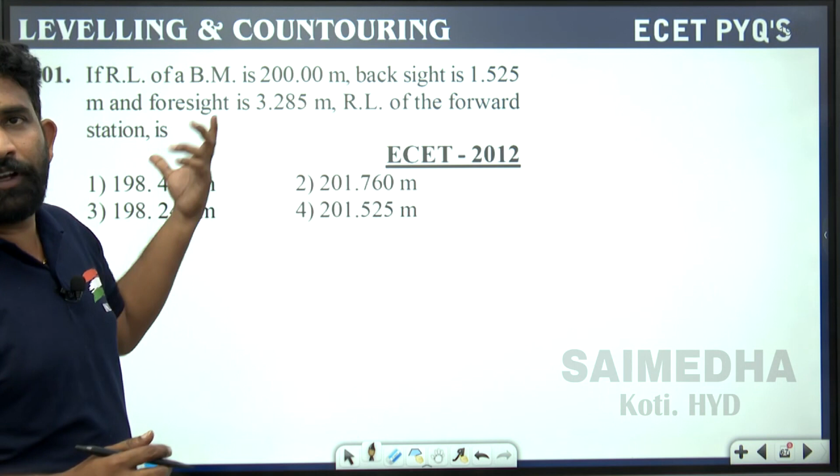Now we are going to see the ECET PYQs of the chapter Leveling and Contouring. So if you see the very first question: if the RL of the benchmark is 200, backsight reading is 1.525, the foresight is 3.285, RL of the forward station is dash. The very first thing here is, try to draw a figure from the given data, right? So this is a benchmark. RL of benchmark is 200,

where the backsight reading on the benchmark is given here as 1.525 and the foresight is 3.285. Now he is asking us the RL of the forward station. Very simple here. This is 200. So 200 plus 1.525 minus 3.285 will be giving me the answer. Why? Because backsights have to be positive, foresights will be negative, because here no inverted staff was there. So you can take the direct values here.

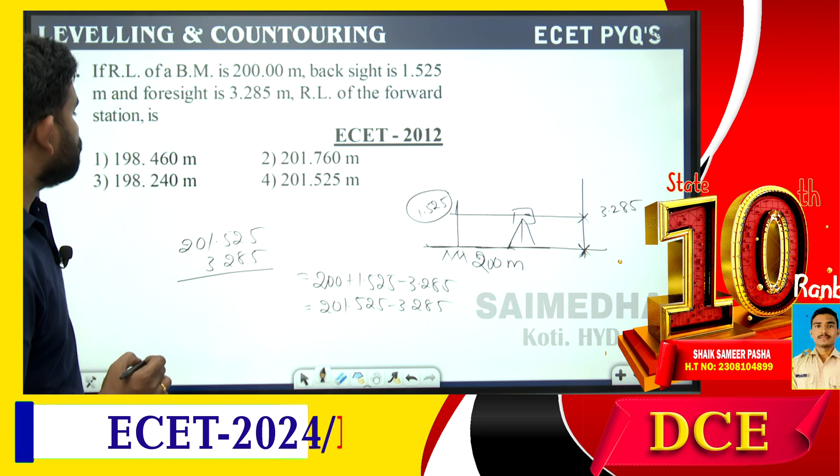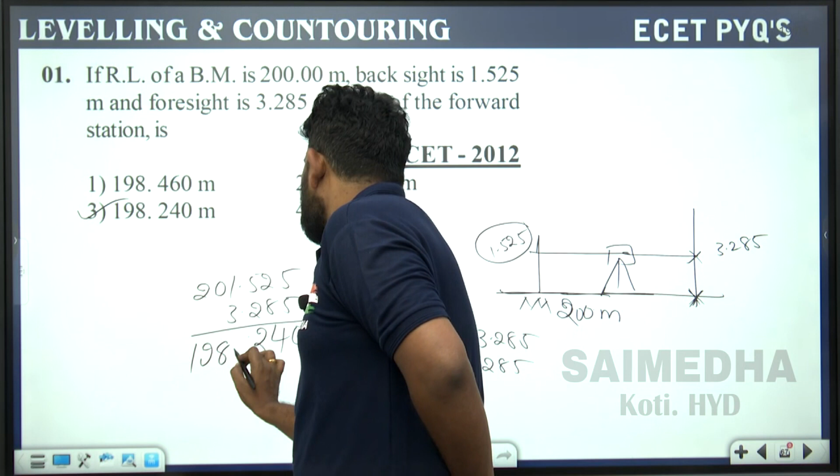201.525 minus 3.285. So if you subtract this, 201.525 minus 3.285, this is 0, 8, this is 4, this is 4 minus 2, this is 2, so 240. So directly I will be taking this 198.240. So this will be the correct answer. This RL here is 198.240. Very simple and easy equation, right?

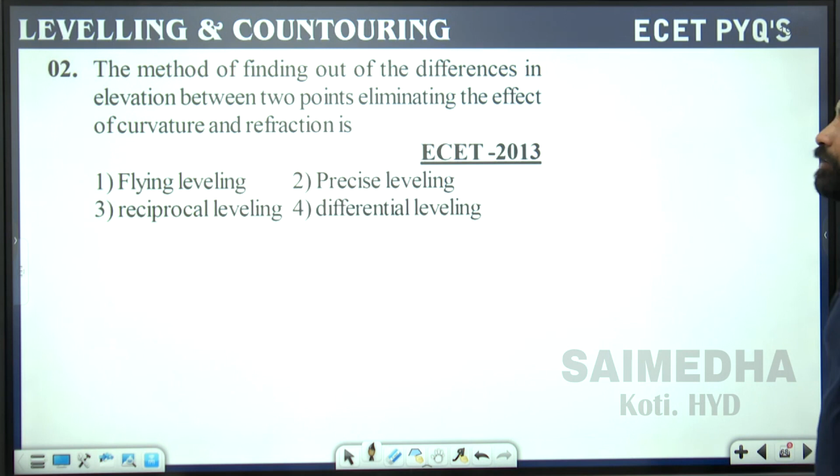Moving further, the method of finding out the difference in elevation between 2 points eliminating the effect of curvature and refraction. Curvature and refraction will be eliminated only in the case of reciprocal leveling. So direct answer here, reciprocal leveling. The surface of zero elevation around the earth which is slightly irregular and curved is known as the geoid surface, because whenever you see the earth's surface when it is completely filled with water, whatever surface this outer surface occupies, we call it the geoid surface. Next, the fixed point of known elevation is called benchmark because it is a point of known elevation.

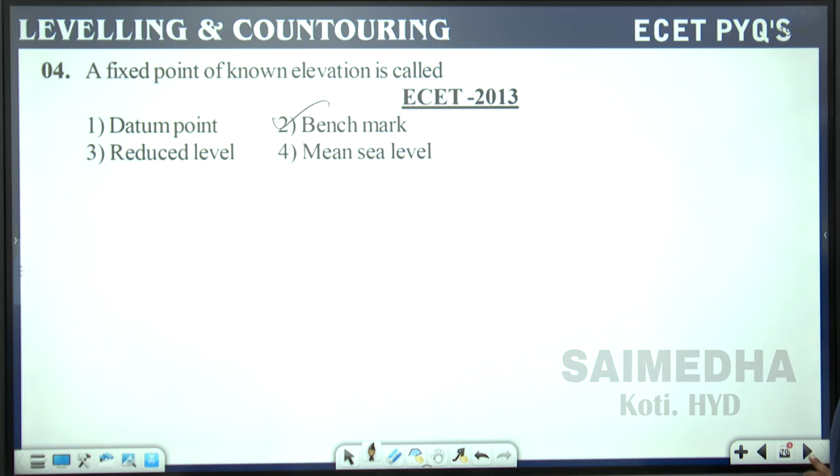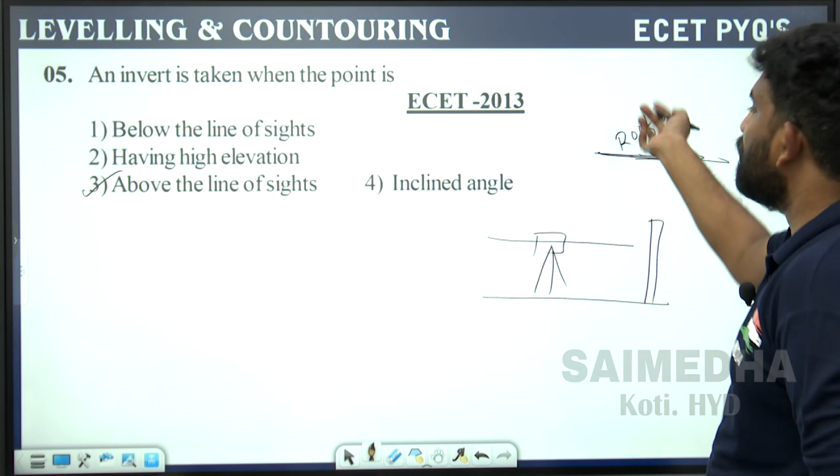An invert is taken when the point is above the line of sight. See here, this is the line of sight, and if I want to find out the RL of roofs, it is not possible for me, because I won't be able to touch this one. So if it is beyond the line of sight, then I will be going for the inverted staff reading. That means I will be inverting the staff like this, so that I will be able to read and reach the top. So that's the very simple point here.

It is not below the line of sight, it is not having high elevations, it is not inclined angles. So it is above the line of sight. Now moving to the next question. Due to the curvature of the earth, the object looks lower than its original position.

This is the Earth's curvature. If you are observing this point while maintaining our station here, it will obviously appear lower than its original position.

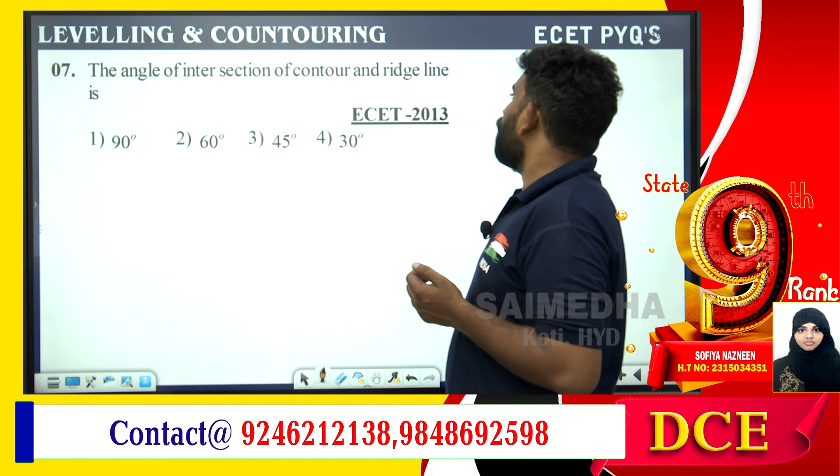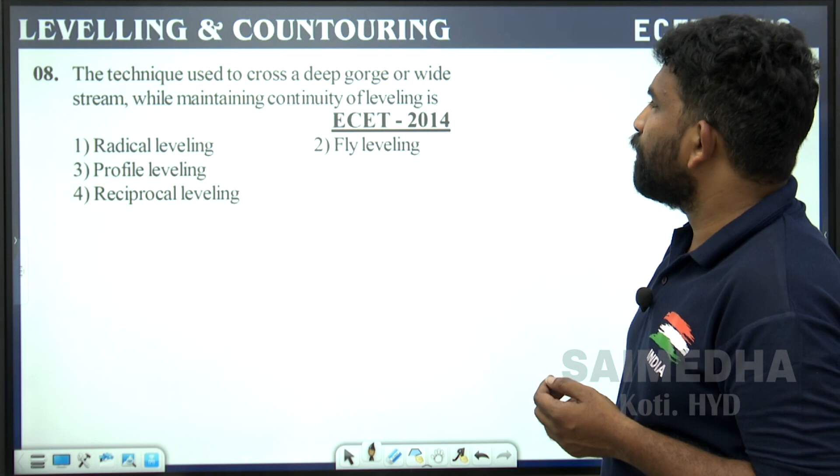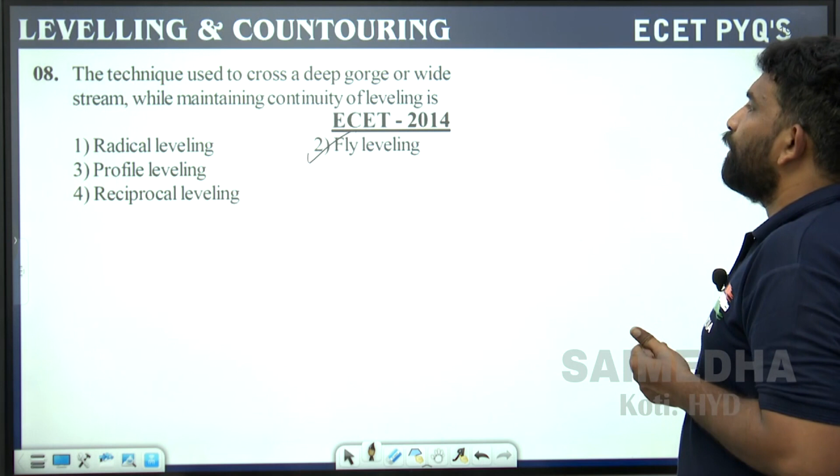This is the technique used to cross a deep gorge or wide stream while maintaining the continuity of leveling. Generally, continuity of leveling will be carried out in fly leveling, so to cross a deep gorge or wide stream while maintaining continuity. The option for this is there is nothing called radical leveling.

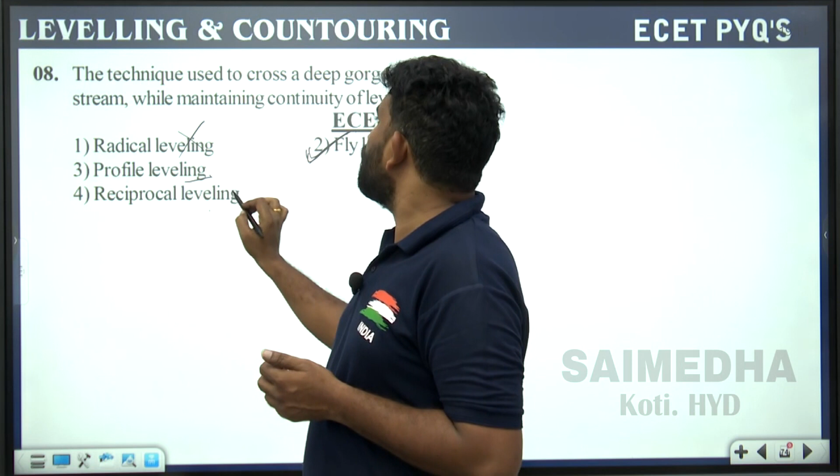Profile leveling will be observed for these alignments. Reciprocal leveling is a technique used to cross a deep gorge or wide stream while maintaining the continuity of leveling.

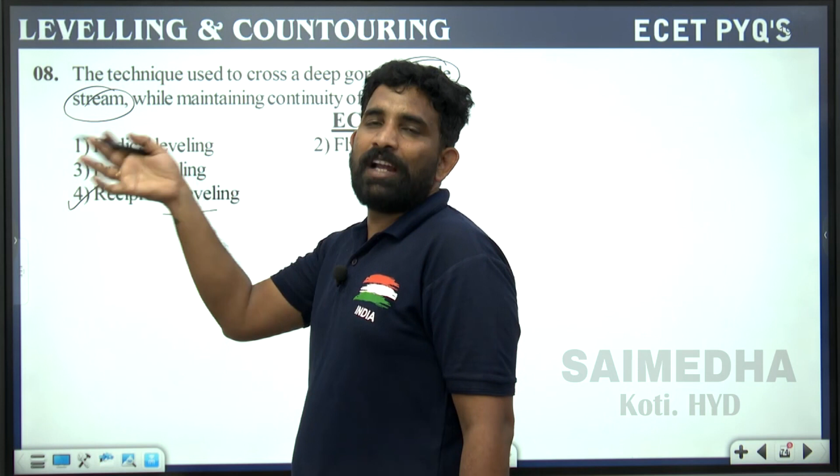Here he mentioned a water body. So whenever a wide stream comes into picture, we will go for reciprocal leveling, because in this wide stream there might be a chance of errors caused due to curvature and refraction. So the correct answer is reciprocal leveling, not fly leveling, because we generally won't opt for fly leveling when a deep gorge or wide stream comes into picture.

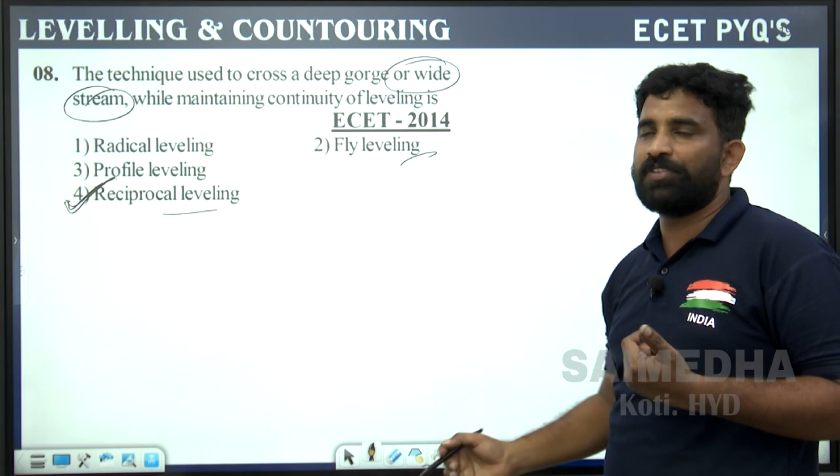Moving further, the sign of combined correction for curvature and refraction for an angle of elevation. The combined correction: generally the curvature correction is negative, the refraction correction is positive, so the combined correction here is negative.

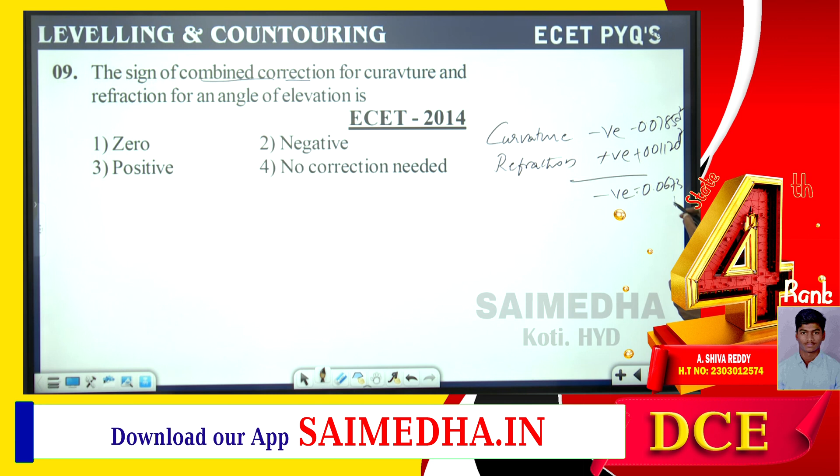Why? Because the curvature value is high, this is 0.0785 d square, and the refraction is 0.0112 d square, which is a positive value. If you solve these, you get a negative value, that is 0.0673 d square. This is the resultant, so that's why the negative value comes here. So clearly negative.

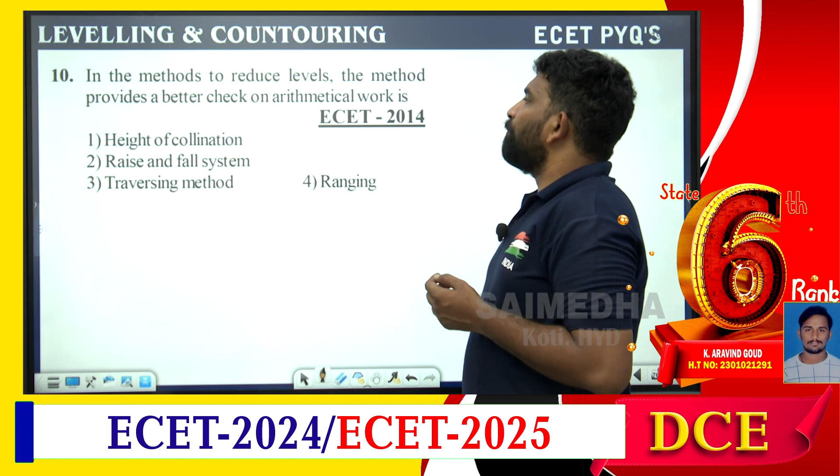In the methods to reduce levels, the method that provides a better check on arithmetical work means we have to calculate more number of checks. That is possible only in the rise and fall method.

If you observe the rise and fall method, the check is: summation of backsight minus summation of foresight equals last RL minus first RL, which equals summation of rise minus summation of fall. So here we have an additional check, providing a better arithmetical check. So obviously the answer is option number 2.

The staff reading taken on a point of known elevation is a backsight reading. So the very first staff reading taken upon a known elevation is nothing but a backsight reading.

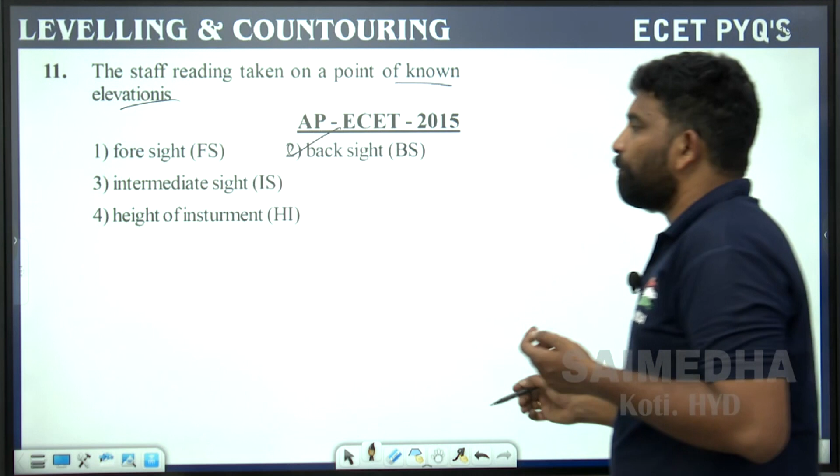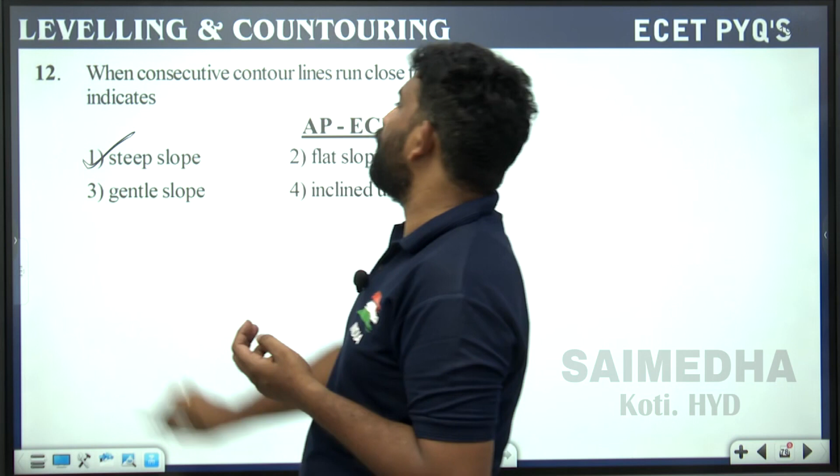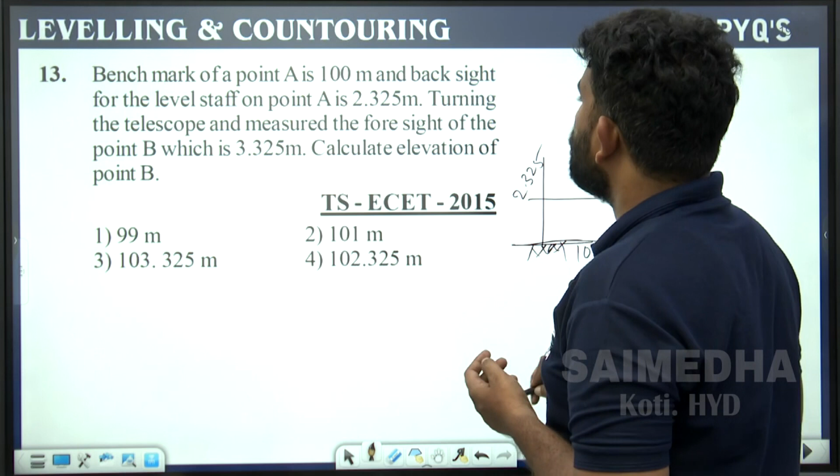The benchmark of a point is 100, and the backsight for the level staff on point A is taken. So here is the leveling instrument, and the backsight reading was taken, and the value came out to be 2.325. Now turn the telescope and measure the foresight of B, which is 3.325. Calculate the elevation of B.

So if I turn this telescope, swinging the telescope head, the value here is 3.325. Now what is the RL of this point? This is point A and this is point B. We are supposed to find out the elevation of point B.

Very simple, as I have already done: this is 100 plus 2.325, because this is the backsight reading which is always positive, minus the foresight, which is negative. If you solve this, you get the answer.

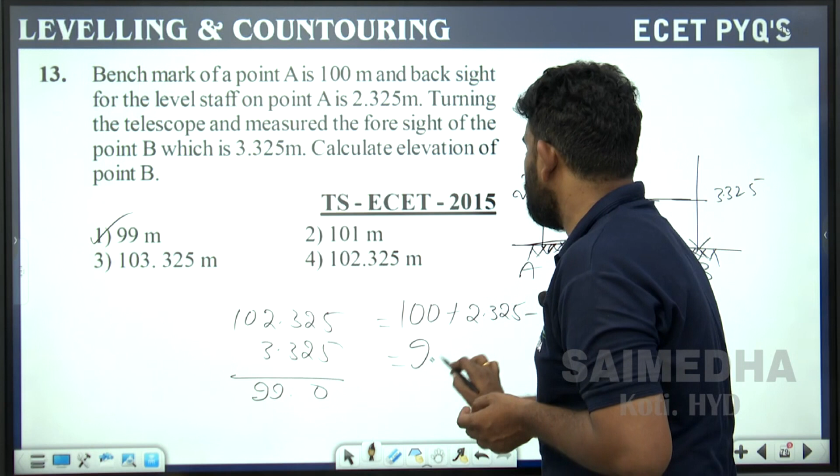So this is 102.325 minus 3.325. This is 0 here, 102 minus 3 comes out to be 99 meters. So very simple, 99 meters. So obviously option 1 is the correct answer.

What is the nature of a terrain if the contour lines increase in elevation from inside to outside? Take a contour map here. What he says is the value increases in elevation, so the RL value will be increasing from inside to outside.

For example, if I call this 99, 90, this is 91, 92, 93, 94, and 95. Now as we go inside, the value is coming lesser. Does that mean this represents a depression? When the values are increasing as we go inside, that represents a hill. But here the values are going on decreasing, so this represents a depression, not a plane, not a ridge.

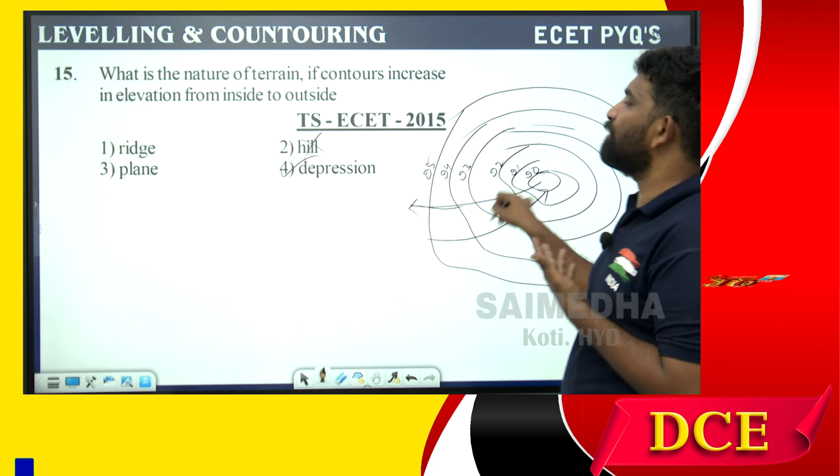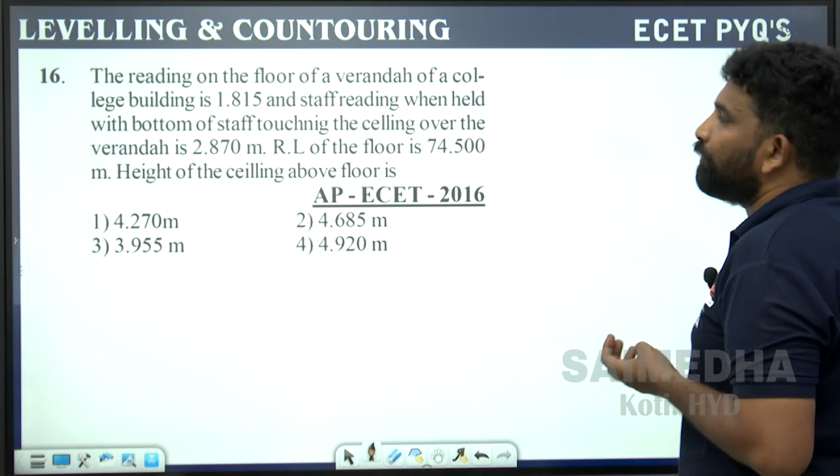Moving further: the staff reading on a floor of a veranda of a college building is 1.815, and the staff reading when held with the bottom of the staff touching the ceiling over the veranda is 2.870. RL of the floor is 74.500. Find the height of the ceiling above the floor.

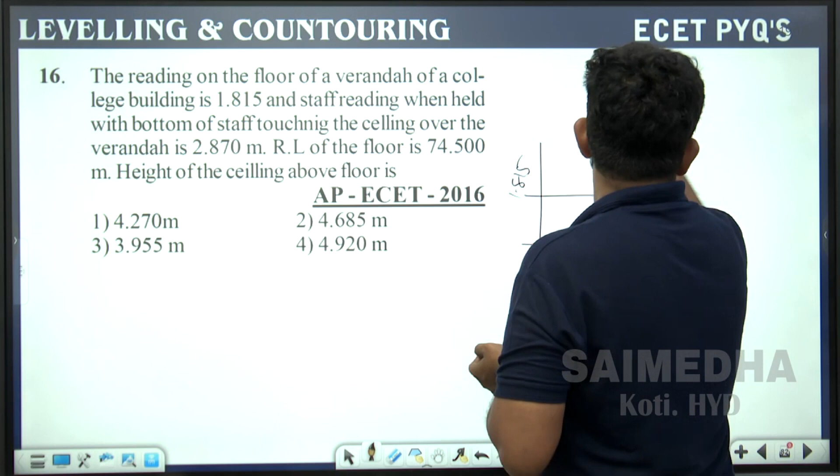This is the floor of the veranda, having an RL of 74.50 meters. If I keep a staff and observe the reading here through the leveling instrument, the floor reading comes out to be 1.815. Here is the ceiling, and there is a staff placed there, so an inverted staff reading will be observed since it's the ceiling, and this reading comes out to be 2.870 meters.

Now the question asks only for the height of the ceiling above the floor. So 1.815 plus 2.870 will give me the direct height of the ceiling. So this is 5, 8, 16, 2, 3, 4, giving 4.685. So 4.685 will be the correct answer, irrespective of the RL given. No need to take care of that, because from here I need to start.

So this is floor and this is ceiling. So total height can be 2.870 plus 1.815 — a direct objective question.

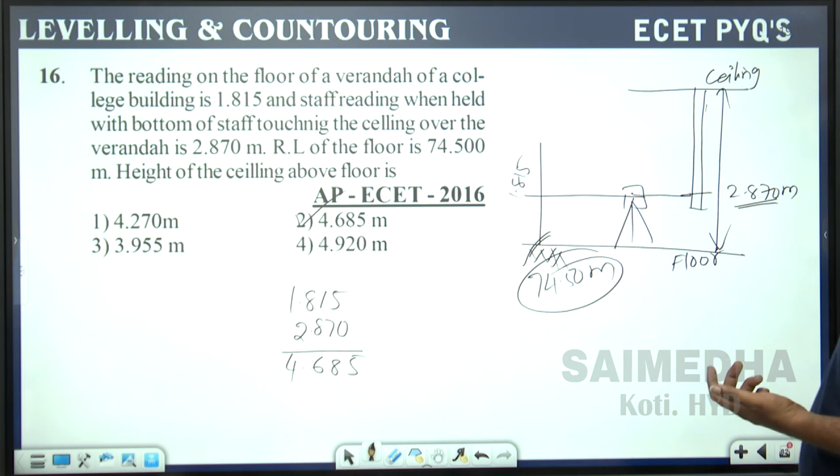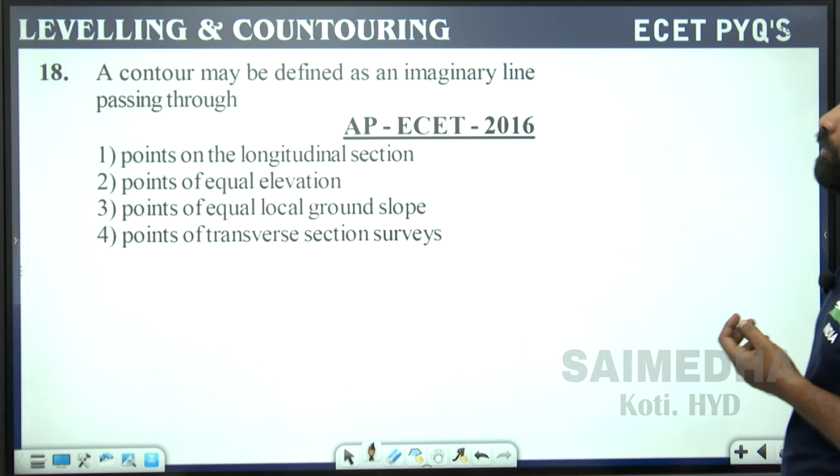Moving further, a contour may be defined as an imaginary line passing through the points of equal elevation.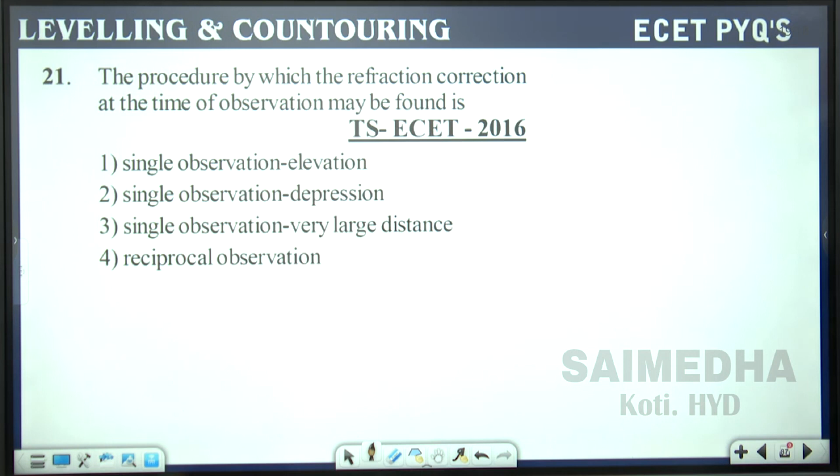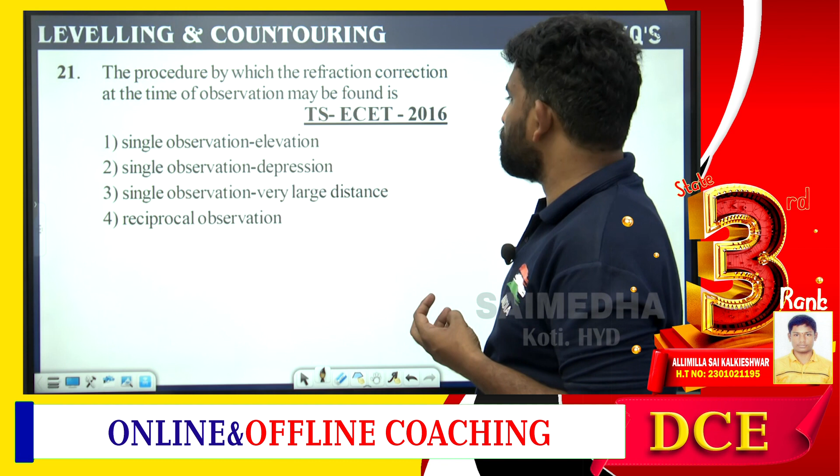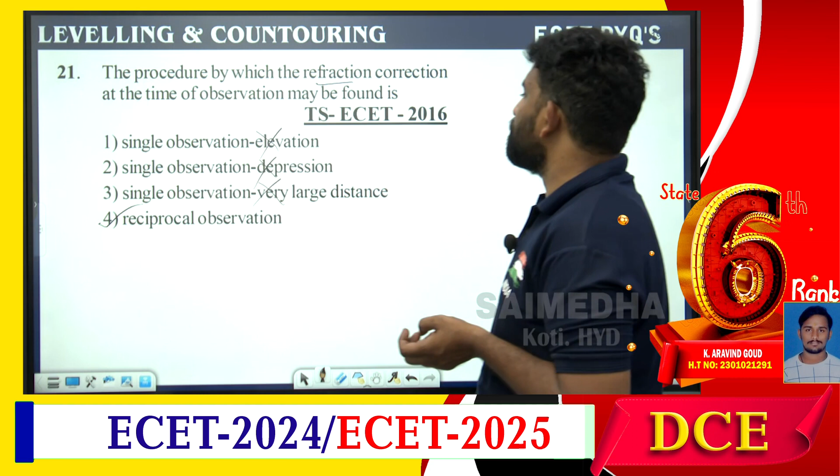Moving further: the procedure by which the refraction correction at the time of observation is found is — options are single observation elevation, single observation depression, single observation at very large distance, or reciprocal observation. The refraction correction is generally found only through reciprocal observations, not any single observation at elevation, depression, or large distance.

Periodic variations in the level of a surface of a large body of water like a sea or an ocean are called tides. Based upon the tides, we are going to find out these elevations - the MSL, that is mean sea level. So periodic variations will be observed for the tides, so as to form this mean.

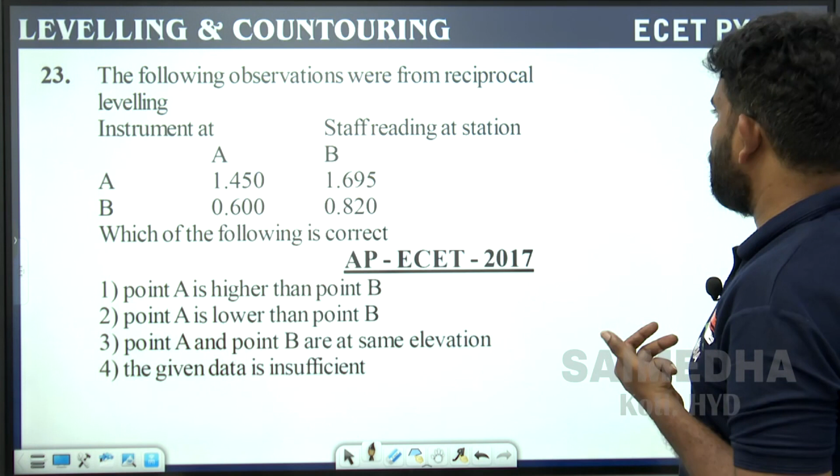The very first reading is 1.450. And if I proceed, in leveling instrument at A and the staff reading at B, if I take from here, the reading is 1.695. That means I have to reach a higher value. I will be able to reach that higher value when the B value is at a lesser ground level, and then I will get higher maximum values.

I will be able to get the higher maximum value when this B value is lower than A. That means A value is higher than B. So point A is higher than point B will be the correct answer.

Simple, direct question. Moving further, a leveling station is a place where the level has been set up.

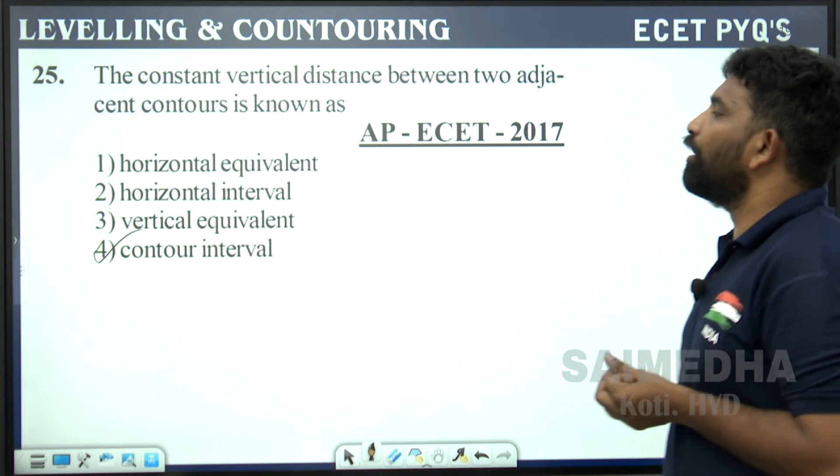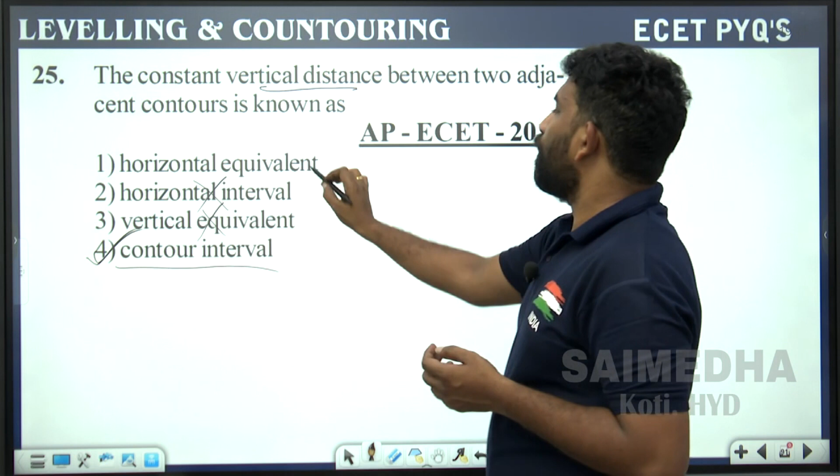The constant vertical distance between two adjacent contours is known as - vertical distance is nothing but contour interval, horizontal distance is nothing but horizontal equivalent. But he is asking us to find the vertical distance, so the answer will be contour interval. It's not horizontal interval, it's not vertical equivalent, the answer is contour interval. Horizontal equivalent is for horizontal distance, so that is not the correct answer.

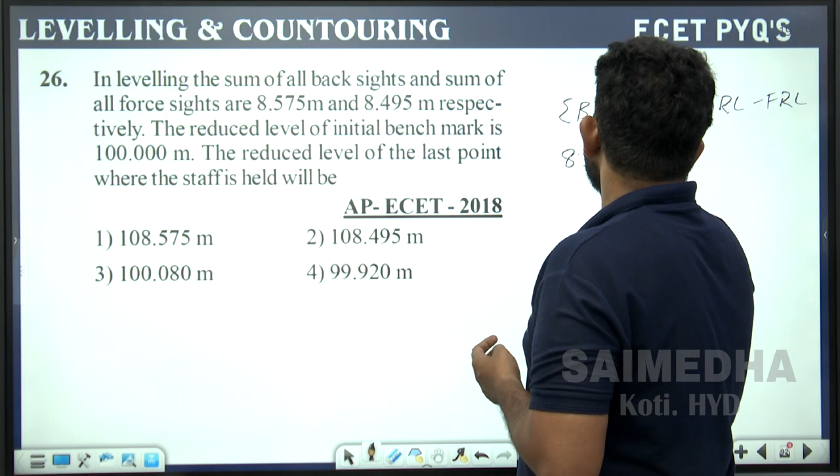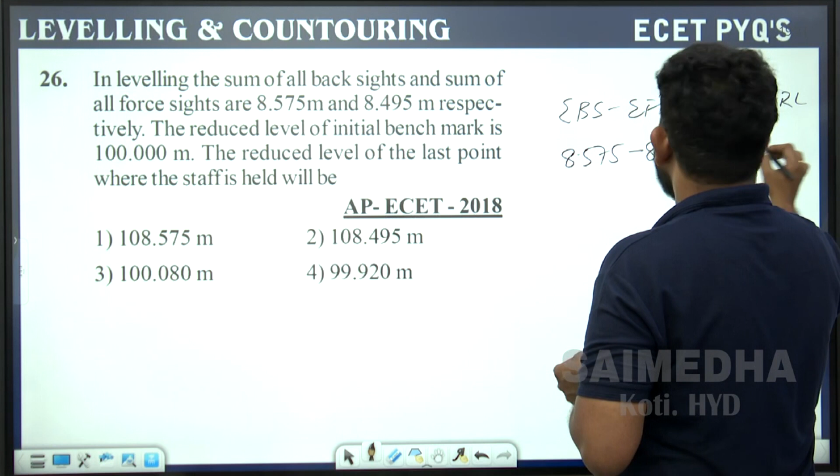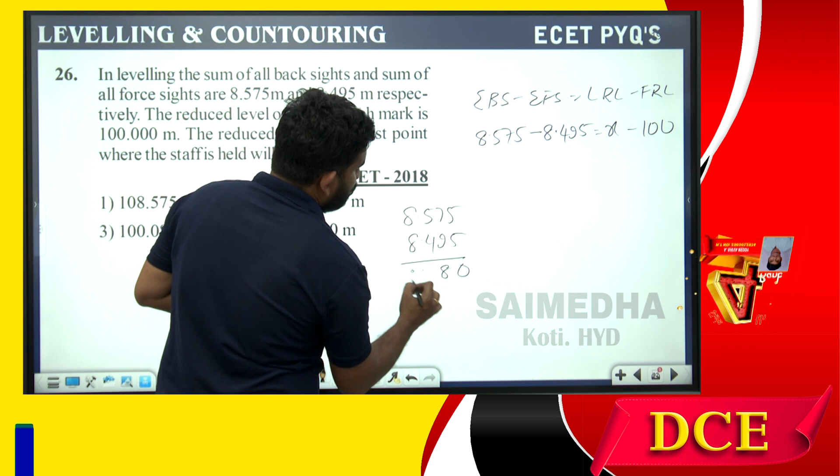So first RL was given here as 100, this is X, so from here I need to find the value of X. 8.575 minus 8.495, the value comes out to be 0.080. So now, 100 plus 0.080 equals X, so the X value comes out to be 100.080, which will be the correct answer.

Simple question. Moving further, for a hilly terrain the ideal method of contouring is the radial line method.

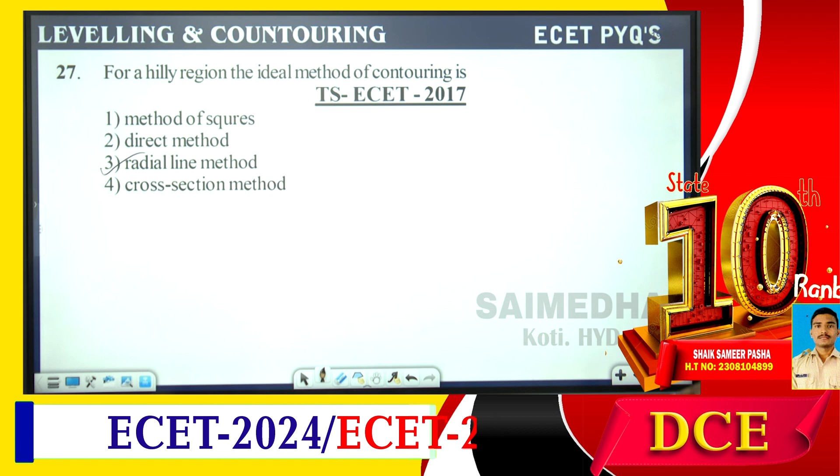If the distance between the instrument station and staff station is 1 kilometer, find the combined curvature and refraction. For curvature alone, the formula is 0.0785 d squared. For refraction alone, the formula is 0.0112 d squared. And for the combined correction, the formula comes out to be 0.0673 d squared.

Now he is asking us to find the combined correction for 1 kilometer. Just substitute the value of 1, and the value comes out to be 0.0673 meters. It is negative, and it has to be negative because combined correction is always negative.

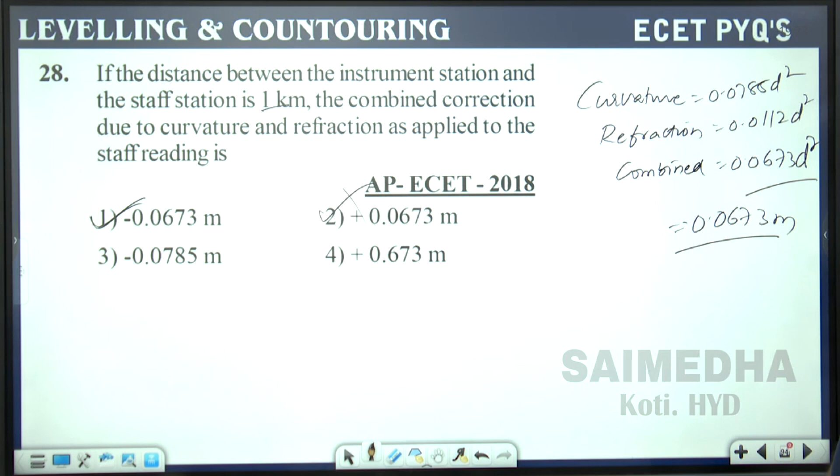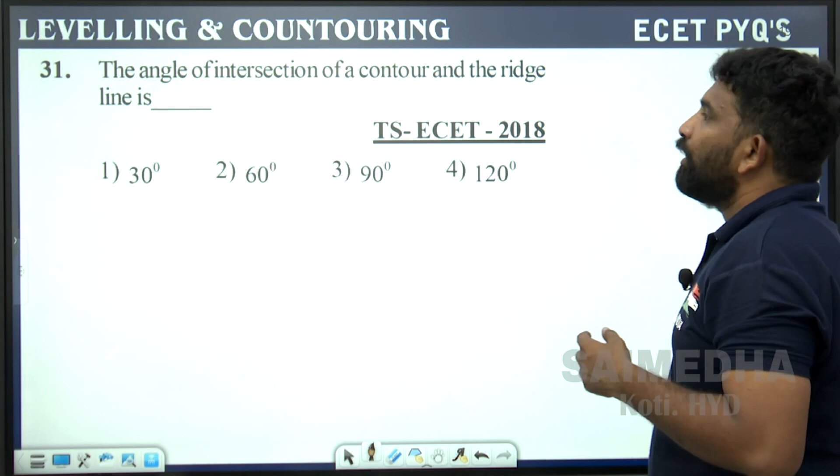Direct objective question. In the leveling survey, the summation of all the back sights and summation of all the fore sights are given here. So we do know the cross check: summation of back sight minus summation of fore sight is equal to last RL minus first RL. Now let us see the given values, the back sight summation and the fore sight summation. This is 8.675 minus 8.595, related to the RL of the initial benchmark. The first benchmark is 100, so X minus 100, right?

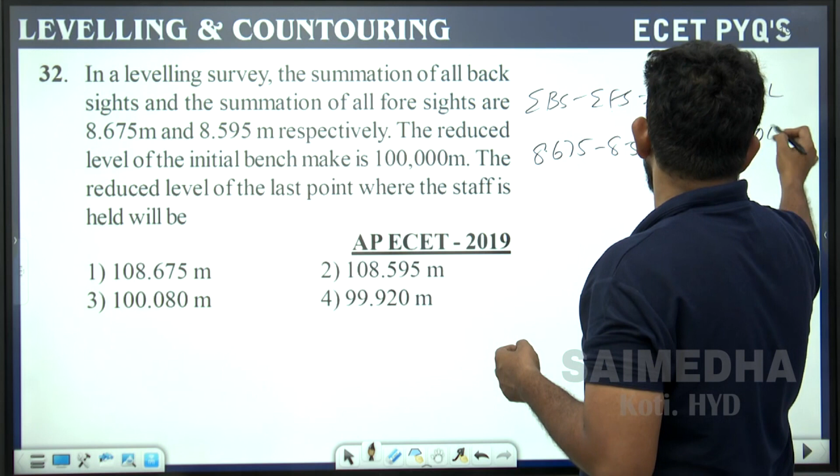So 8.675 minus 8.595 gives 0.080, plus 100, the value comes out to be 100.080 meters. So the X value here is 100.080 meters. So check 100.080 meters.

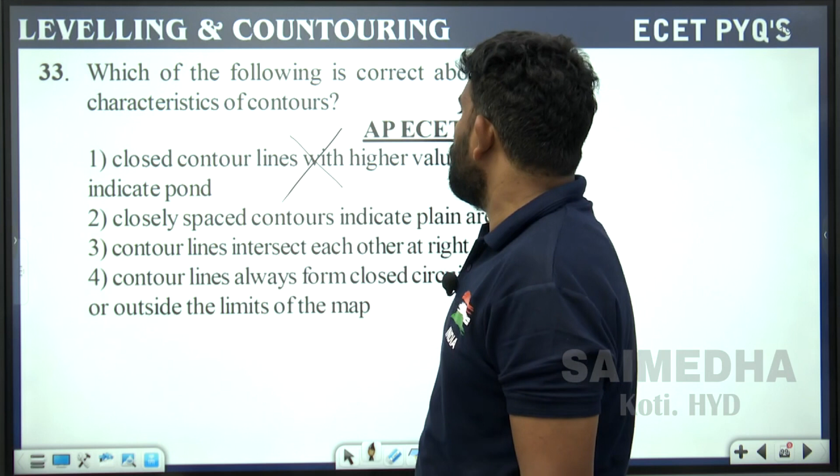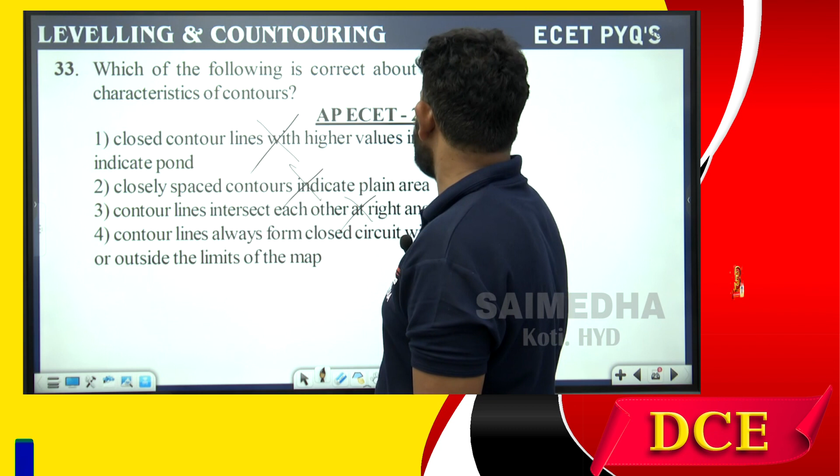Which of the following statements is correct about the characteristics of contours? Closed contour lines with higher values inside represent a pond. No, closed contours with higher values inside represent a hill. Closely spaced contours indicate a plain area. No, closely spaced contour lines indicate a steep slope. Contour lines intersect each other at right angles. No, contour lines won't intersect at right angles. Contour lines always form a closed circuit within or outside the limits of the map. Yes, that's the correct one.

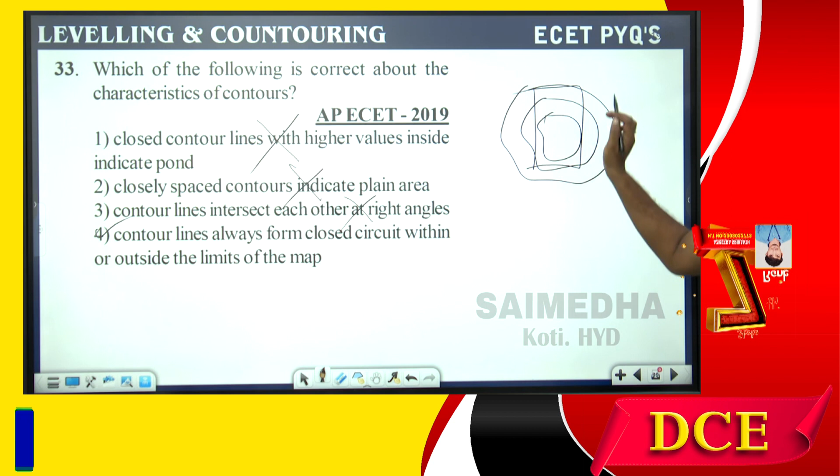So contour lines need not get closed within the map itself, but they have to get closed somewhere outside the map. That's the point he's asking about. Contour lines need not get closed within the map itself, but somehow they will get closed outside the map.

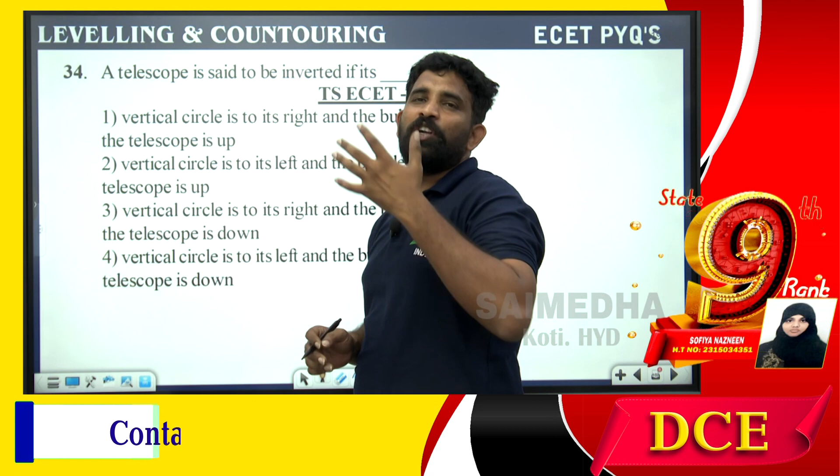If you see the 34th question here, a telescope is said to be inverted if... When is a telescope said to be inverted? Generally for the telescope there will be a gun sight. If it is towards the upper direction, then it is said to be in the correct position. It will be in the correct position when the vertical circle is towards the left of the observer. But he said here it is inverted, so obviously the vertical circle will be towards the right side.

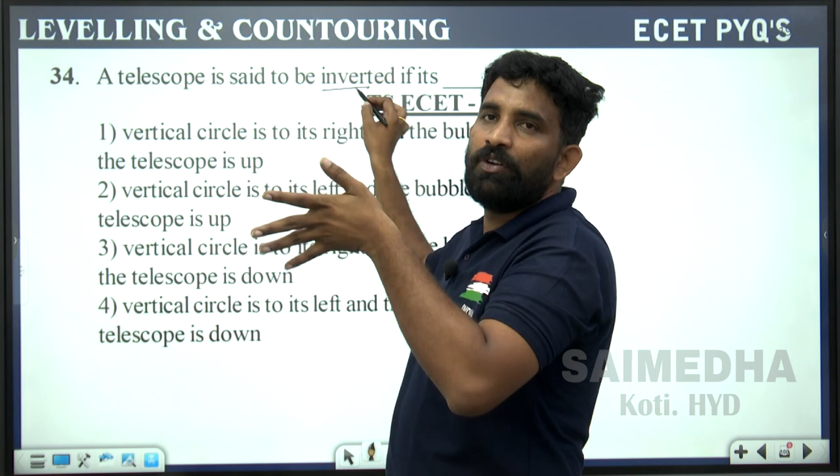And the bubble also will be down. So if you see here, this is right, but the bubble is up. No, this is not the correct answer. It is left? No, it is not left. The vertical circle is to the right, and the bubble of the telescope is down. Yes, this is the correct answer. So option 3 will be the correct answer, right?

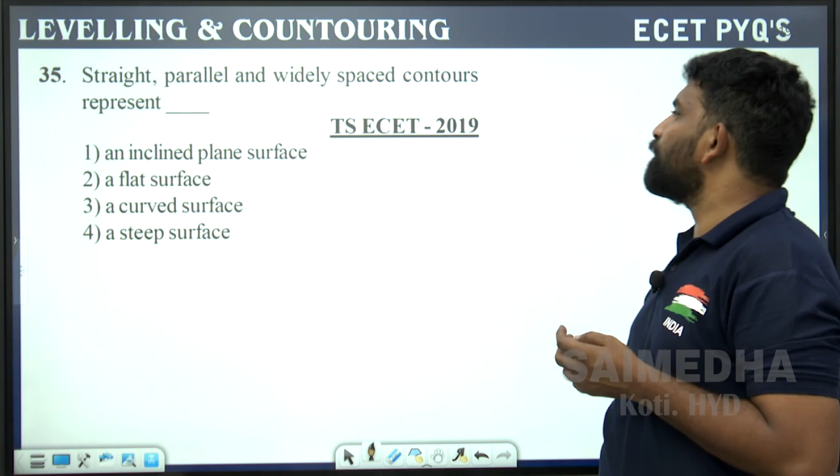Moving further. Straight, parallel and widely spaced contours represent... Widely spaced contours indicate a flat surface. Widely spaced indicates a flat surface. A very simple direct objective question.

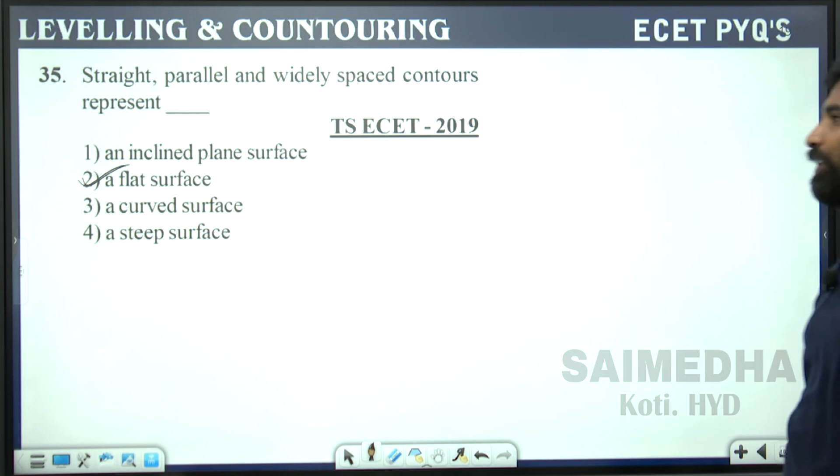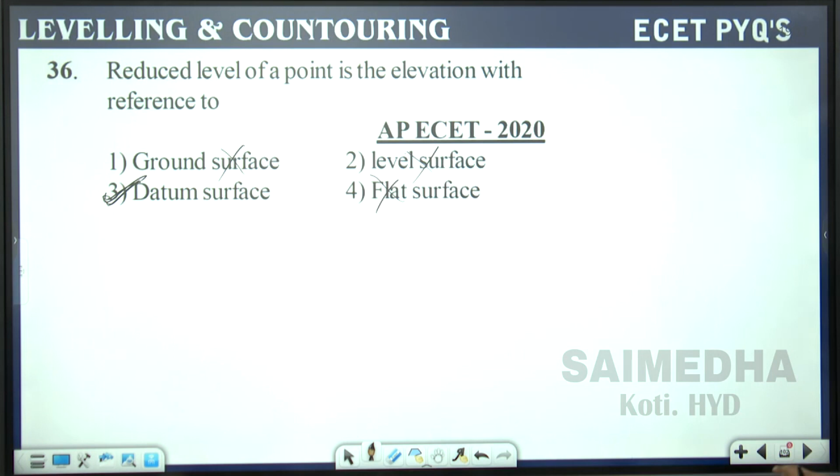Moving further. The observations from reciprocal leveling are as given below. So leveling readings were given here. So it is concluded that... Again here I am going to take the reading. This is station A, and the staff is placed here. Staff reading at station A.

Staff reading at the station A was given here as 1.425. If I go further, the value given here at station B is 1.575, which is possible when the staff is down, because as the staff goes down, the value goes on increasing. So this clearly says that station A is higher than B.

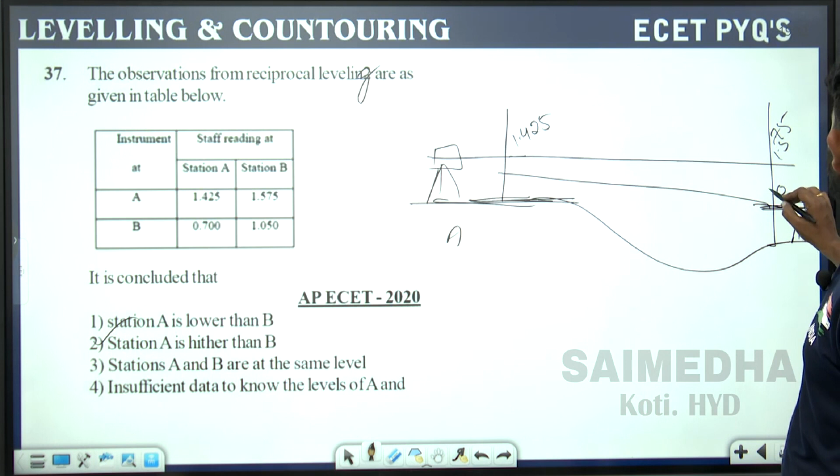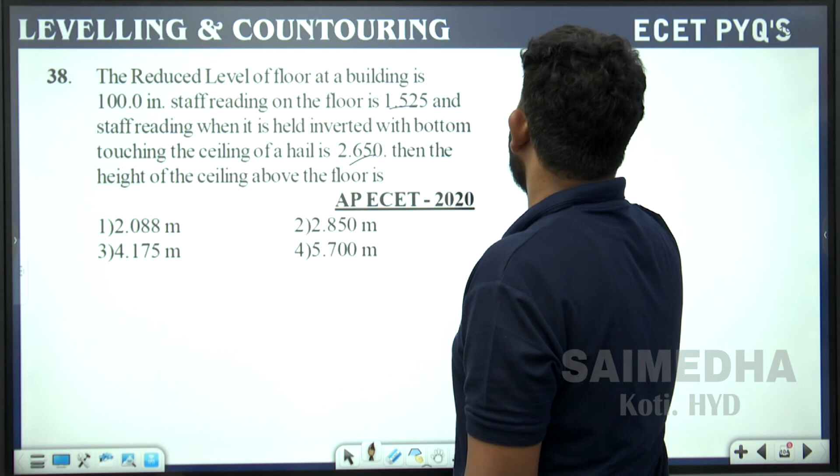38. The RL of the floor of a building is 100 and the staff reading on the floor is 1.525, and the staff reading held inverted with the bottom touching the ceiling of the hall. Already we have seen this question. Just add these two values, 2.650 plus 1.525, and you get 4.175. So 4.175 will be the answer. Simple.

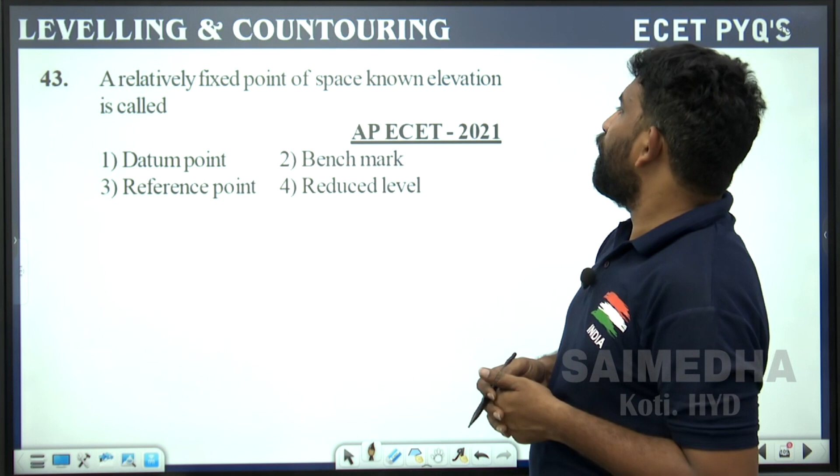A series of straight, parallel and widely spaced contours represents a flat surface. See the 43rd question: a relatively fixed point of known elevation is called a benchmark. A known elevation fixed point is nothing but a benchmark, right?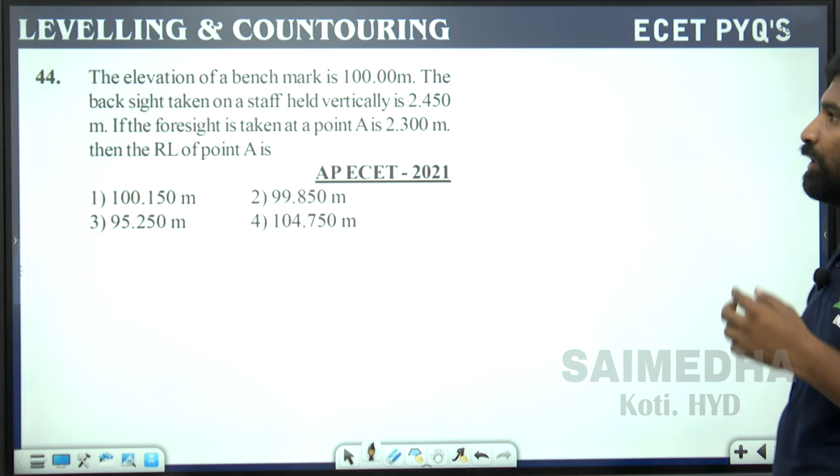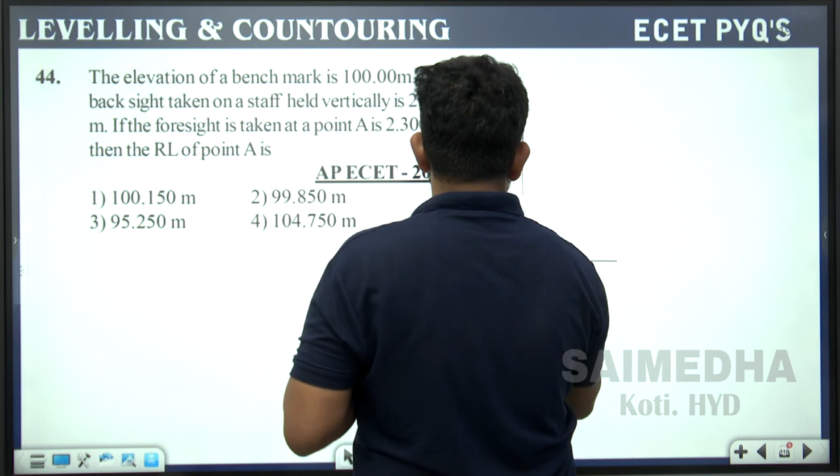Moving further, the elevation of a benchmark is 100 meters, the backsight taken on the staff held vertically is 2.450, the foresight taken on point A is 2.300, the RL of point A is what? So this benchmark has a value of 100, the backsight reading on this staff is 2.450, and the foresight on point A is 2.300. Now what is the RL of this point?

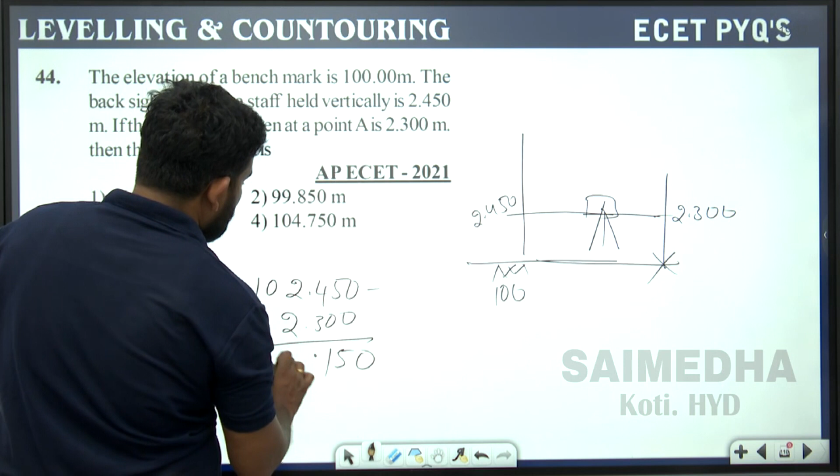Very simple: 100 plus 2.450 gives 102.450, minus 2.300, and you get 100.150. 100.150 will be the answer. Simple, right?

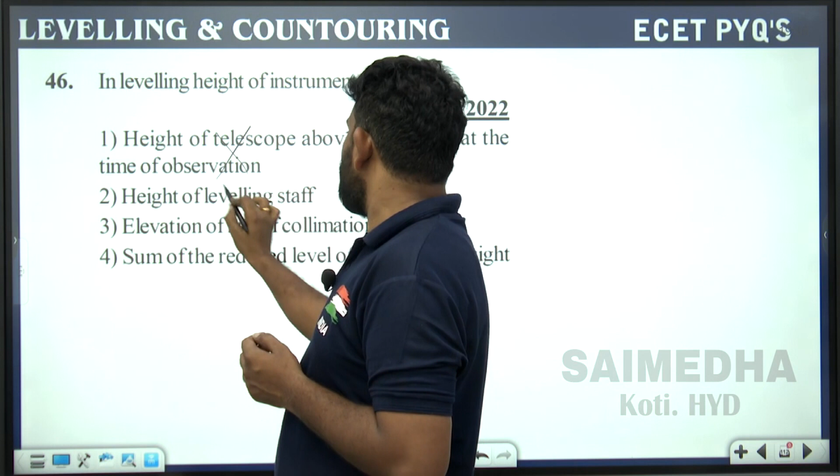In leveling, height of the instrument is: height of the telescope above the ground at the time of observation, no. Height of leveling staff, no. Elevation of line of collimation, yes. Summation of reduced level, no. The only correct answer here is elevation of line of collimation.

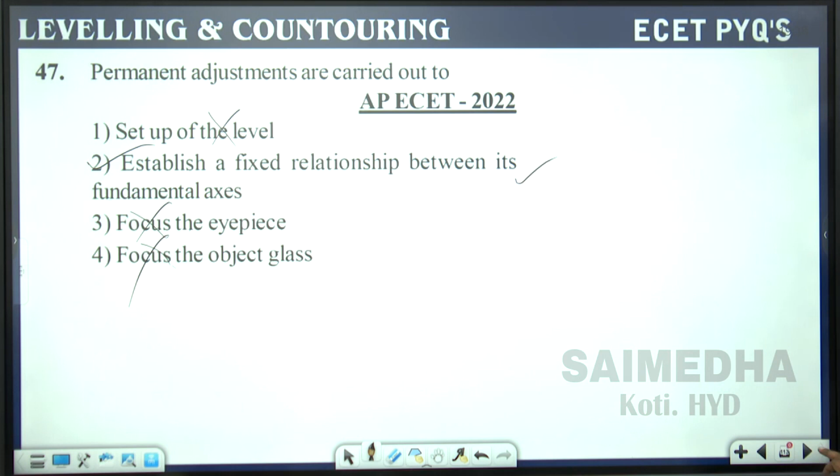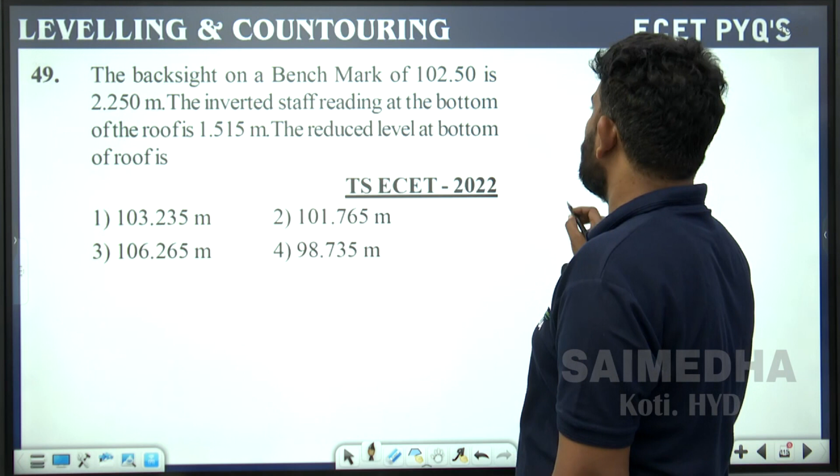Simple. The backsight on a benchmark of 102.50 is a backsight, so bottom of the roof. So again here the roof, okay. So if you see this question in a diagrammatical way here, this is the backsight reading on the benchmark. The benchmark is 102.50, and the backsight reading taken here is 2.250, okay, and it is an inverted staff reading that is taken at the bottom of the roof. So there is some roof here. Upon the roof the reading was taken, and the value is 1.515.

Now what is the question asking here? The reduced level of the bottom of the roof. So very simple here, just keep on adding all those: 102.50 plus 2.250 plus 1.515, you see 102, 103, 104, 105. So the answer is 106.265. Very simple and direct objective question.

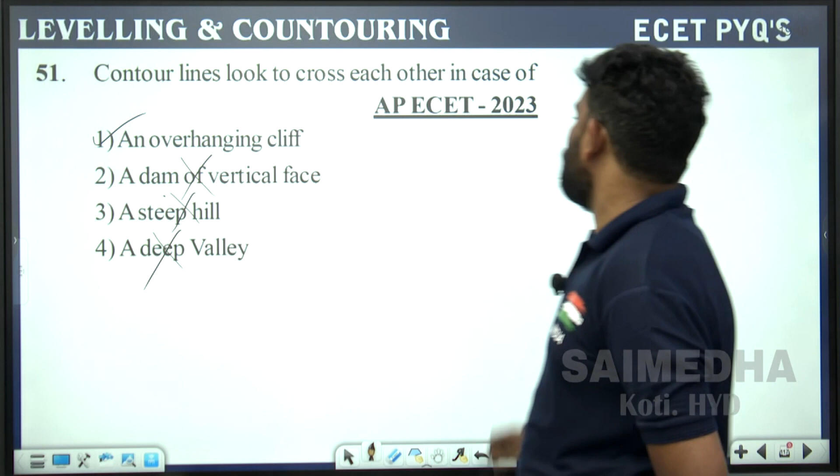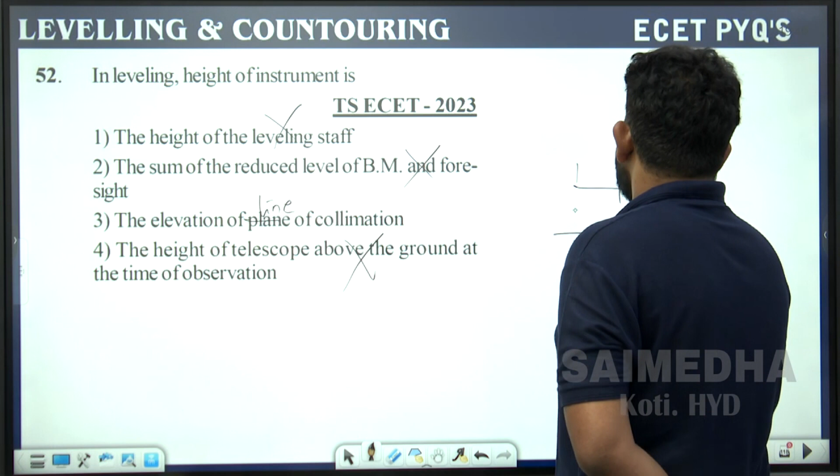Okay. In leveling, the height of the instrument is the height of the leveling staff, no. The elevation of plane of collimation, no. The sum of the reduced level of BM plus foresight reading, no. The height of the telescope above the ground at the time of observation, no. See, the height of the instrument is the RL of benchmark plus backsight reading. We can't take the foresight reading here. But here nowhere was the backsight reading mentioned.

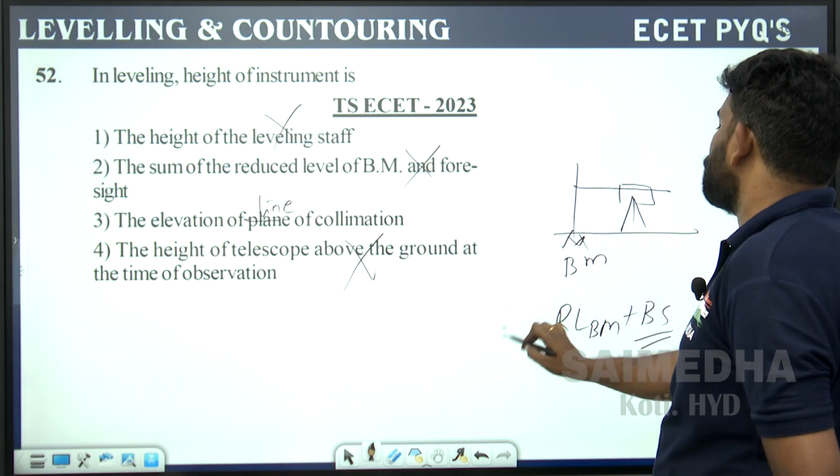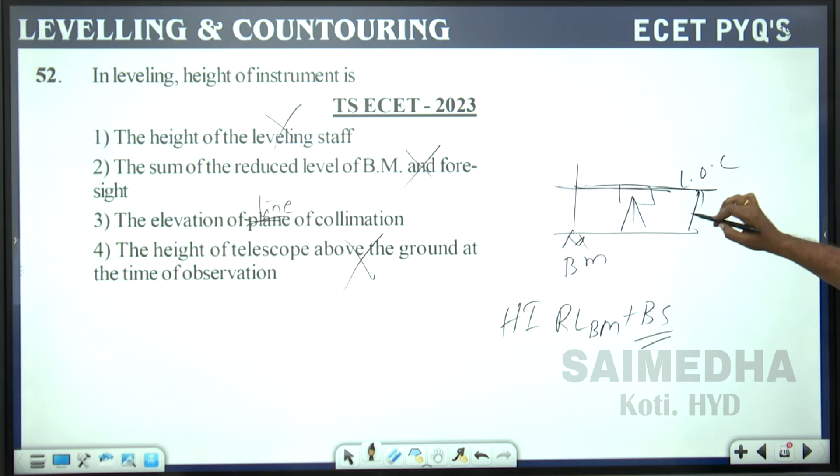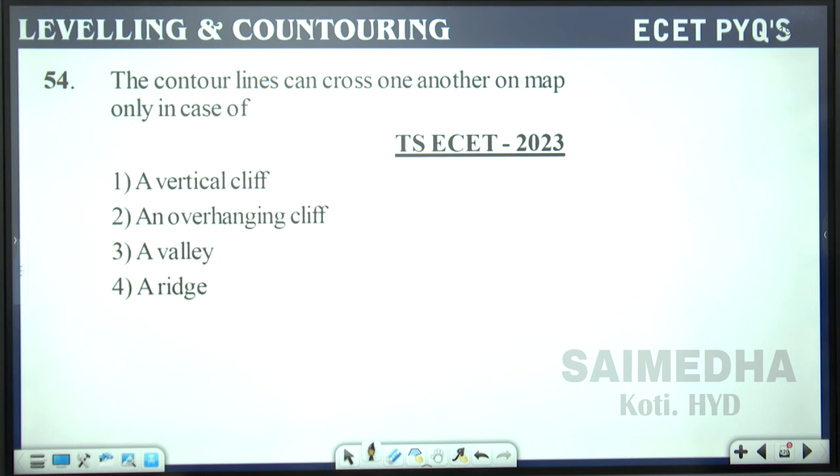The contour lines can cross one another on the map only in the case of an overhanging cliff. Already we have seen the overhanging cliff's contour map, so the contour lines will be getting overlapped; they can cross each other. So these are all the questions seen in the leveling and contouring PYQs. Practice yourself very hard so that you will be able to solve all these questions comfortably. Hope you will be doing good. Thank you and all the best.